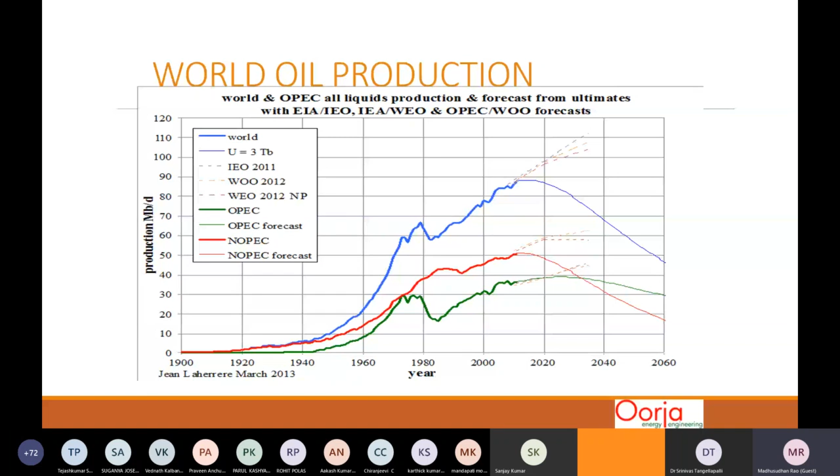In almost all cases, what we've been seeing is that solar thermal as a technology is considered post-installation. Very few projects considered solar thermal during the project's implementation stage itself. Many times when we talk to the industry, the system is already running, the process is already going on, and then we have to retrofit it.

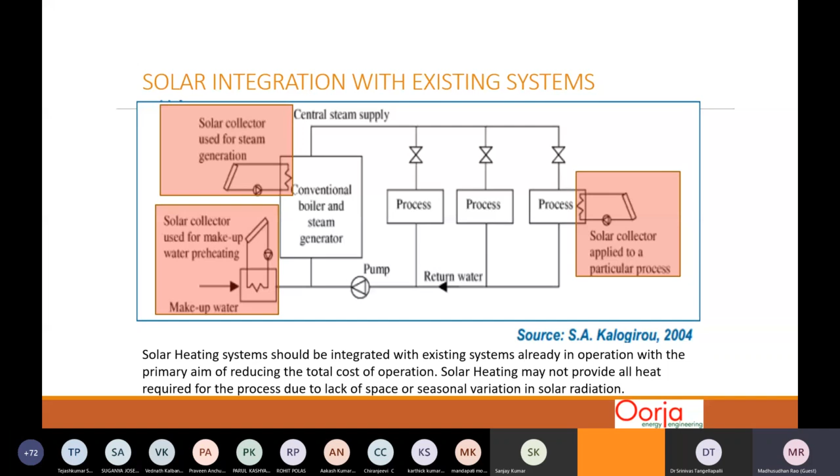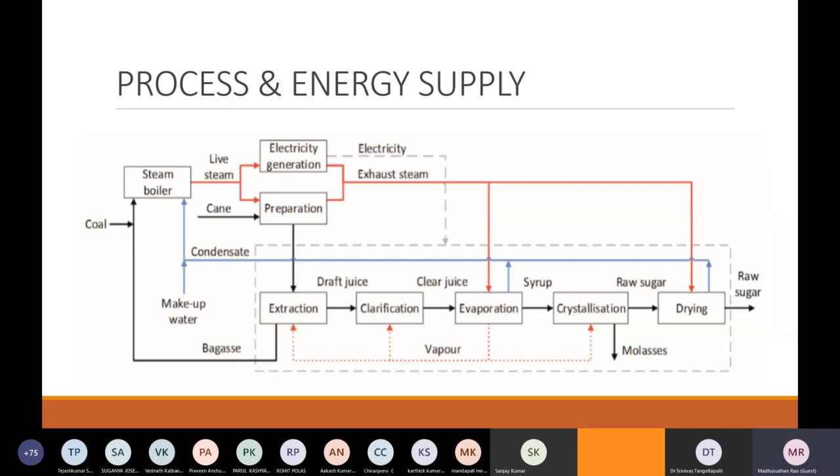So now, if we enumerate what are the process temperatures. As I said, the boiler live steam, which is from the boiler, the maximum temperature is about 360 degrees centigrade. The return from the process comes at 128. So similarly, there are other temperatures. You will see that there is a great amount of variation in the temperatures that are required for different processes, both in the feed temperature as well as the return temperature. So based on this, we can grade what is the opportunity for us to implement solar thermal.

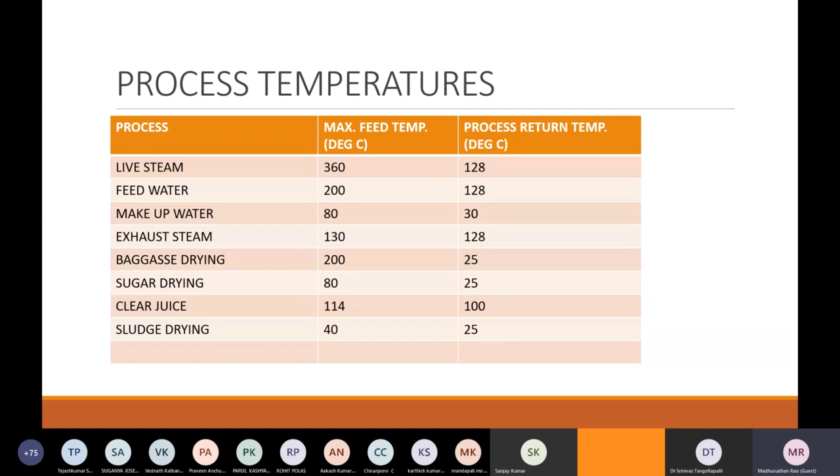So if you see, the highest potential opportunities would be the ones which require the lowest temperature. The reason why I'm pointing this out is, many times when we talk to industry, they do the reverse of it. They try to get the highest temperature possible, which is difficult, especially in current conditions. I'm based out of Hyderabad, and there's been so much rain this season that it's been almost cloudy for the last 3-4 months or so. So steam at high temperature cannot be produced in this.

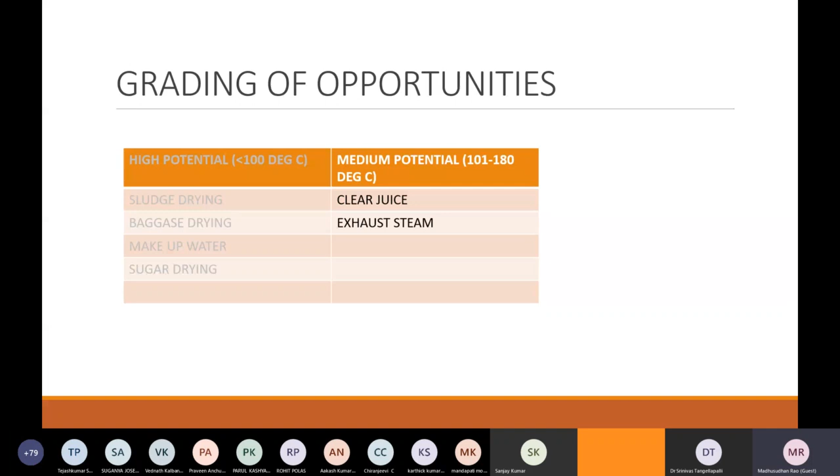See, we have done projects where we have touched even higher temperatures. I'll show you later that in certain projects, we've reached temperatures higher than 600 degrees centigrade. But what matters in an industry is, can you deliver that temperature consistently day after day? So just because we have achieved a particular temperature in certain conditions doesn't mean that we can use that as an example to implement that for industry. Because in industry, every day the production has to be there. They are looking at a consistent and stable source of energy, because the process temperature remains the same. So unless you are able to give that, one shouldn't implement this.

And this is where the challenge with solar thermal comes, because in fossil fuel based systems, we are in control of what should be the input, whether it is coal or diesel or any other fuel. We have a stock of it and we control the feed rate. Therefore, we control the output. So if the output required is, let's say, 100 kilowatt of heating, or 5 tons per hour of steam, we know how much fuel we have to give for that, and we can get that consistently. However, in case of solar, we are not in control of the input. Therefore, we cannot be in control of the output.

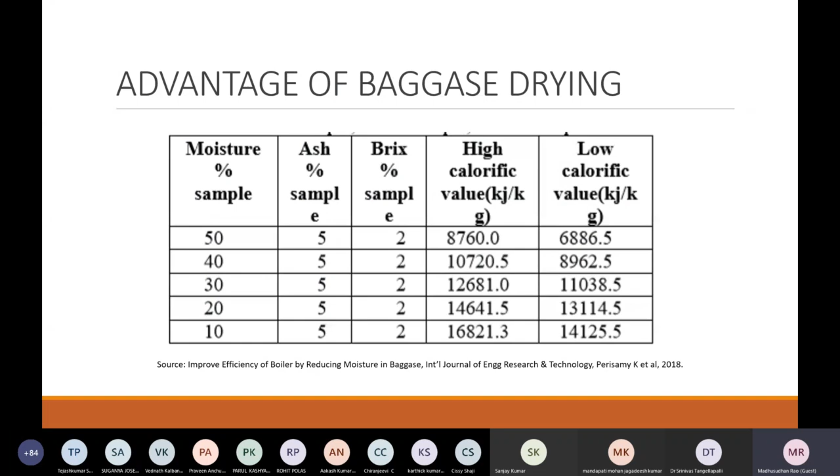In other cases, yes, sorry, sir. Just 1 minute. Sir, the previous slide please, sir. Vacuum tube filter. Yes, sir. This one? Sir, yeah, the vacuum tubes, one end is closed, one end is open. I have a doubt how air will go inside and get heated, because only diffusion takes place, I think so. Is it that effective?

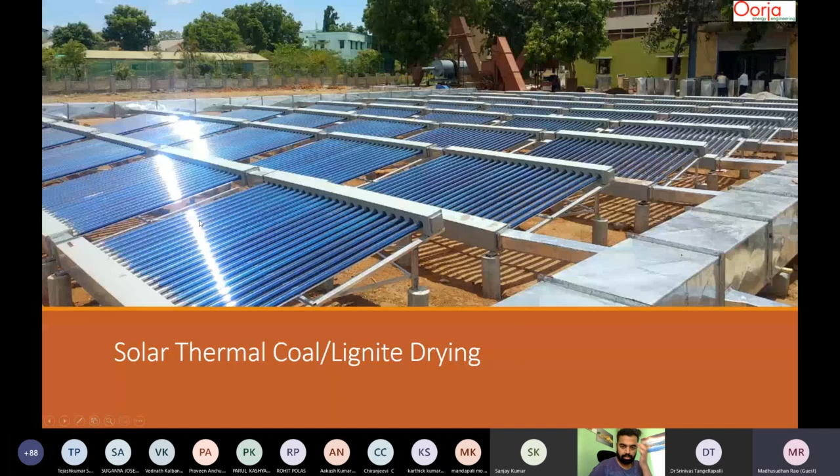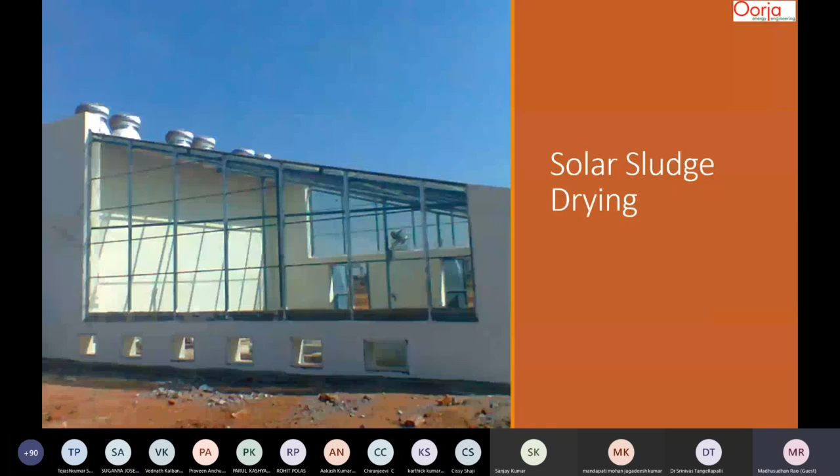Okay, so in this case we have only used solar, but the heat can also be supplemented further. We have given this design, but have not had an opportunity to implement it. Depending on the type of sludge, we can embed pipes like the radiant heating that I had shown in the previous presentation, in which we can circulate hot water, obviously heat.

Even from a cooling plant, water going to a cooling tower can come here, provide that heat, cool down and go back. It can use a heat pump or even an additional solar collector field. It depends. In most cases, we try to use the waste heat that is available to enhance the evaporation rate in a sludge dryer.

These sludge dryers are not common here, but are quite common in Europe, where there are automated sludge dryers which can level and mix the sludge so that the drying happens. The reason why it is popular there is because they have a problem of insufficient radiation, and therefore they use such greenhouses for faster drying. So this is another low temperature application that is feasible for industries.

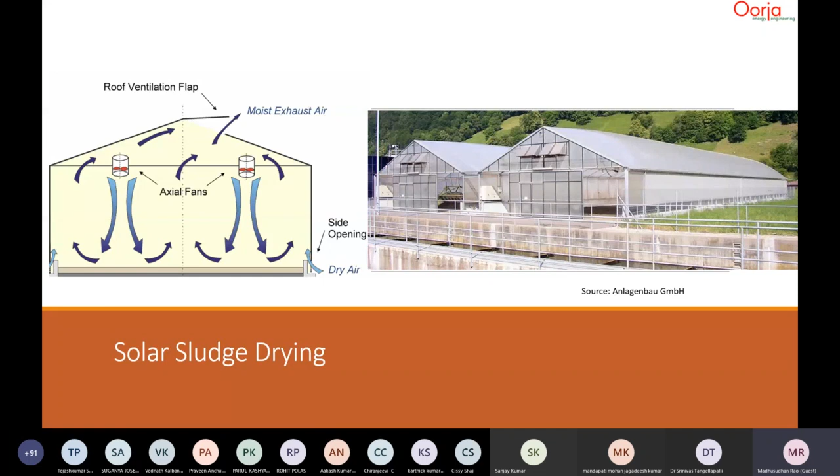Many are aware of agri drying; I will not spend much time. These are simple solar water heaters that were modified a bit to provide boiler make-up water preheating. This is viable especially if the fuel being used is not coal but something like diesel, and there is a constraint of the space available. Then feed water preheating would be the application that is most economically viable, because you will not require a large field, but at the same time there will be savings on the fuel.

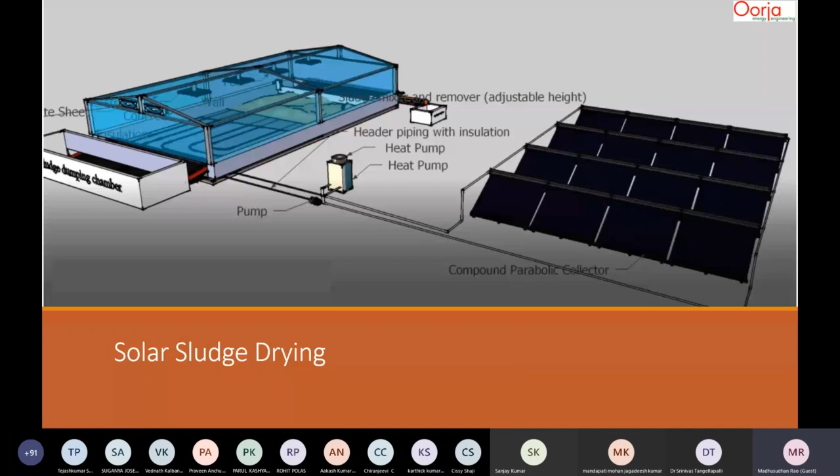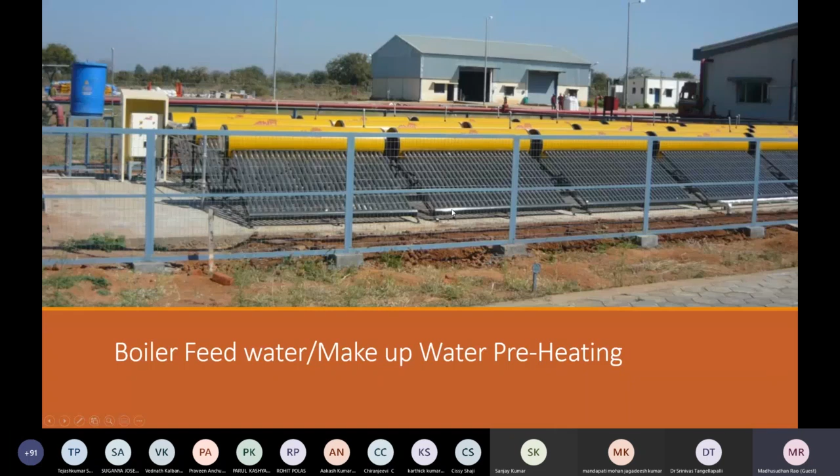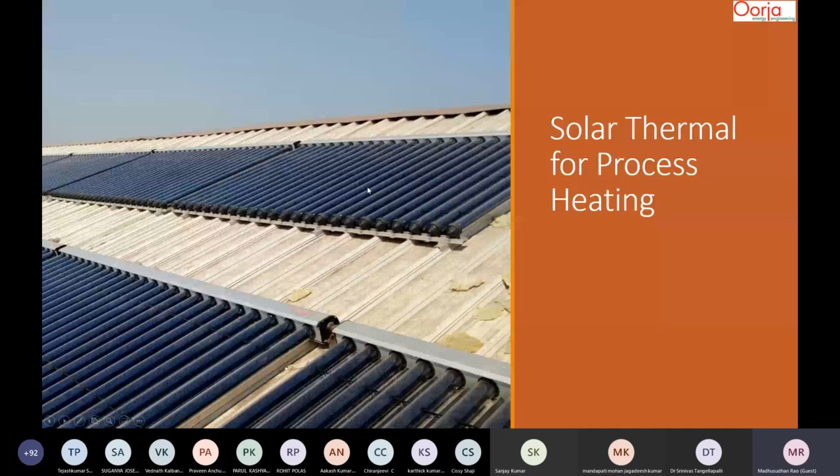So all these applications that I've shown till now are temperatures which are below 70 degrees in most cases. We can use these compound parabolic collectors, in the manifold that you see here, the main header pipe. This is installed in an automotive plant in Jamshedpur, and these can provide temperatures up to 150-160 degrees centigrade, but we usually recommend them for temperatures between 70 to 120 degrees centigrade. So this is the temperature profile of the output that we get from this field.

You will see the field starts delivering high temperature, and of course there is a storage tank also provided in this particular project. So this is for washing of parts. In an automotive plant, you have parts coming in which need to be washed before they can be assembled together. Today, the hot water required for this washing is around 70 to 80 degrees centigrade, and electrical heaters are being used.

These are just the bigger version of the regular washing machines that we use at home. Electricity was being used, so instead of using electricity, it has been augmented by hot water from solar. So you will see that even at 10 o'clock in the night, the temperature available in the tank is around 70 degrees. This has been done with a storage tank of about 2 cubic meters or so.

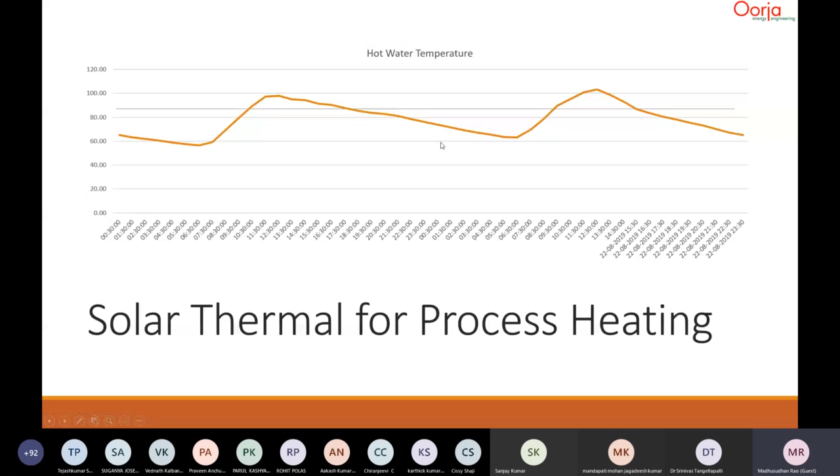This is something that I already talked about in my previous presentation, where space heating applications in very harsh conditions can be taken up using solar collectors and storing that heat in the tank. For higher temperature applications and for steam generation, we use parabolic troughs.

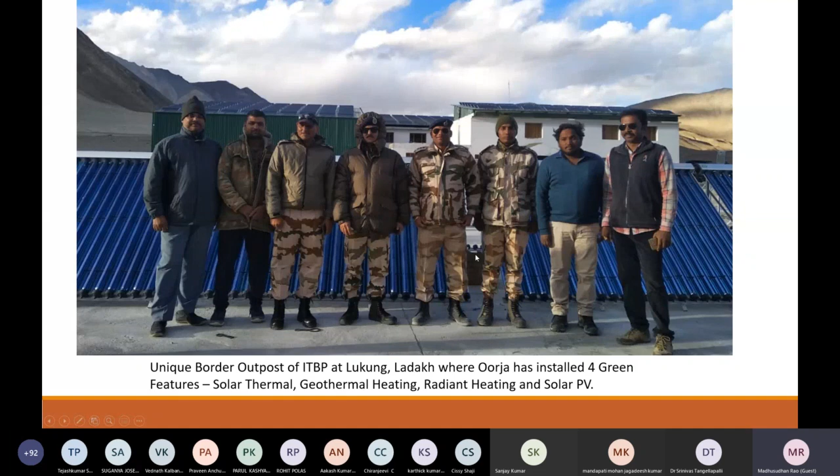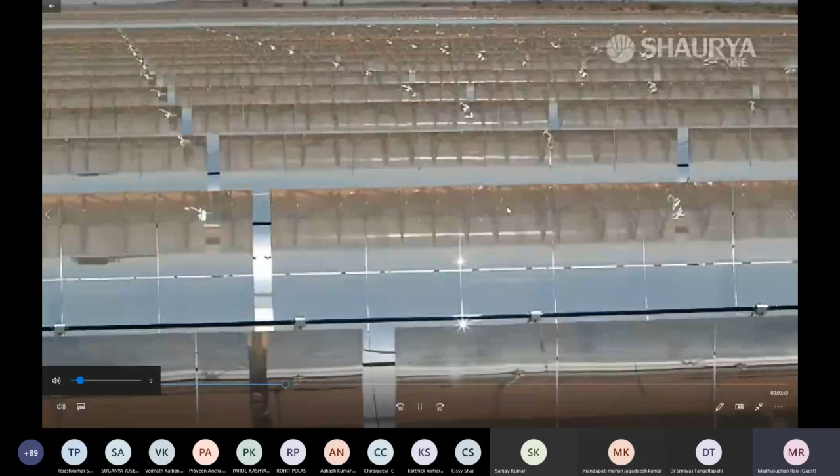So there are large installations that you will see. I'll just quickly show a large installation of such a thing. This is multiple of such one parabolic trough that I showed. This solar field for power generation is in Rajasthan. It's called Godavari Green Energy. It is one of the first, not the first, but one of the first solar thermal based power generation plants.

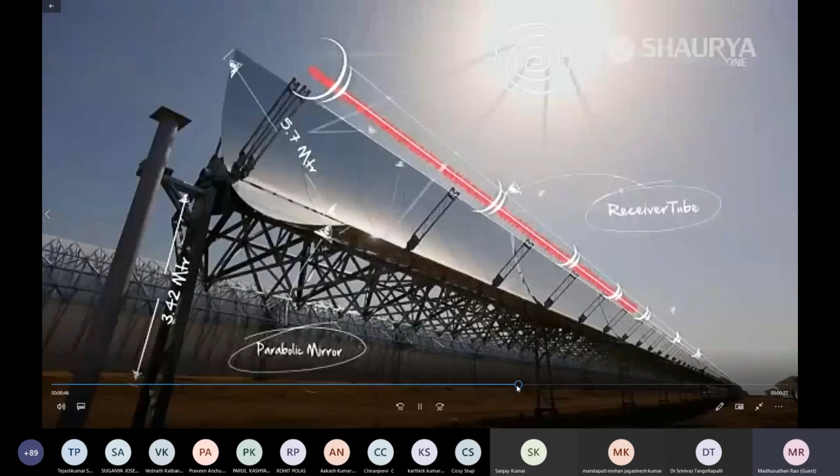So what we manufacture for industrial applications is also of the same size. The span is a standard design across the world. All of us get the same curve because the manufacturers have standardized the curve. This is about 5.7 meters in the span, and the length works out to around 12 meters. So that's a standard size everybody uses.

Sorry, where were we? Yeah.

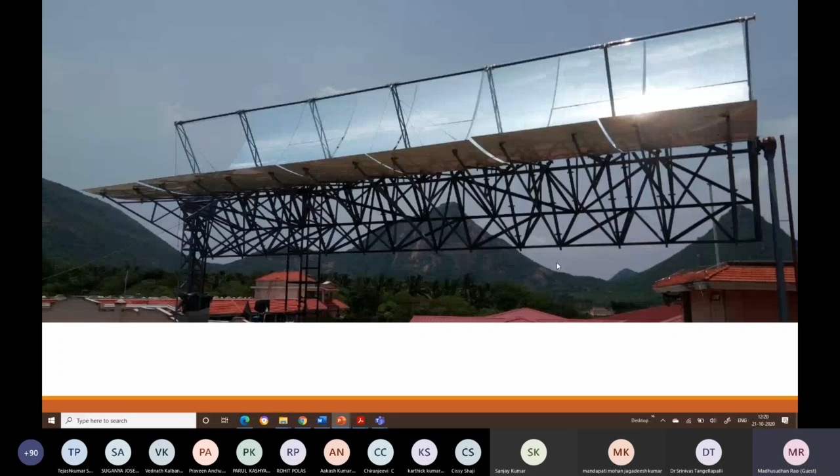Lastly, for temperatures higher than 300 or 350 degrees centigrade, we have typically used heliostats. These are the heliostats with which I was saying we could achieve around 600 degrees centigrade, but we have not used these in any industrial application so far. These were manufactured only for R&D purposes, and under certain conditions we have achieved above 600 degrees centigrade, used primarily for hydrogen production related applications, but that is not a mainstream application.

So hopefully these high temperature solar concentrators will also become viable. At this point, we don't see viability for industrial applications. It will require a little more work till we make it viable for industrial applications. I will get into economics, but if there are any questions at this point, I'll handle that. Otherwise, I'll get into the economics of all these different types of concentrators.

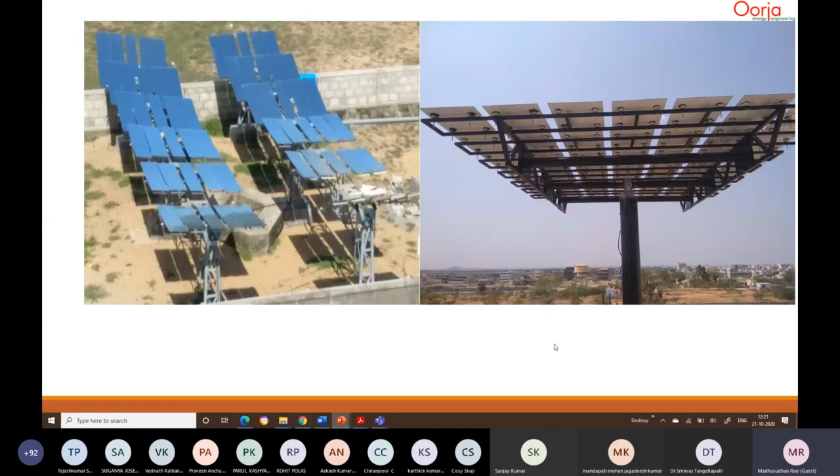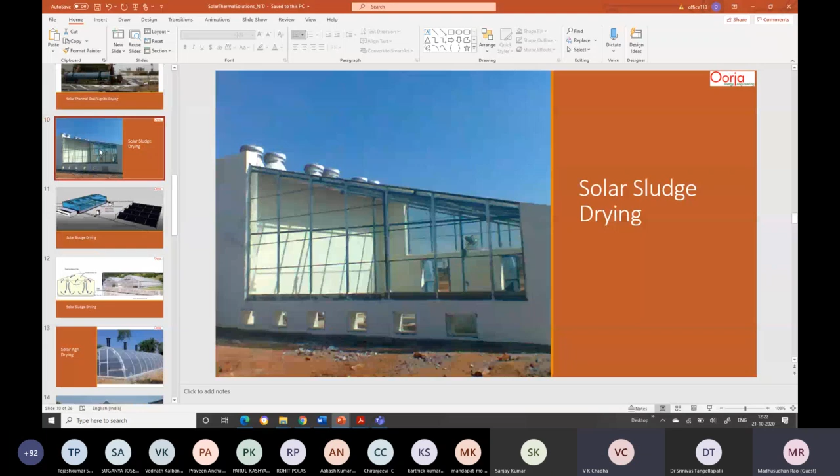Sir, I would like to know about the general procedure of maintenance in these types of plants. What type of maintenance is required, sir? The maintenance that is required is cleaning, which is more stringent in these two types of concentrators, because they are very precise and the concentration ratio is very high, and accumulation of dust significantly reduces their performance.

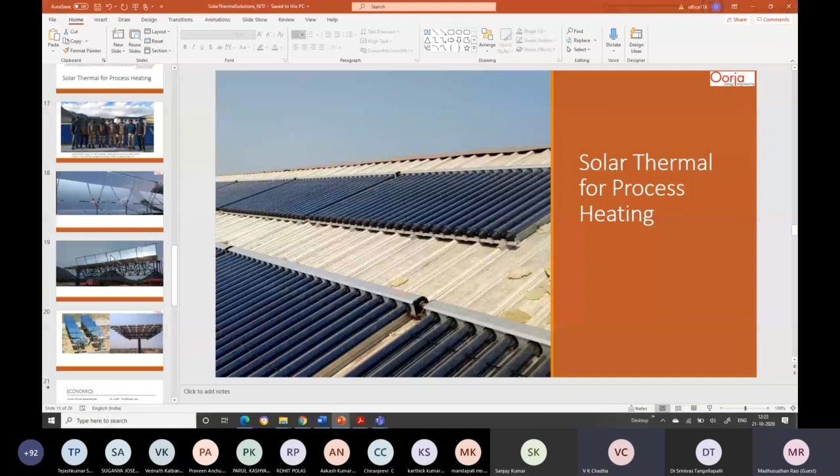On such solar collectors, you can see there is a little bit of dust. If there is a little bit of dust, there will be some reduction in performance. Usually what we suggest for such collectors is cleaning once a month is sufficient. But for these types of collectors, the cleaning is almost on a daily basis.

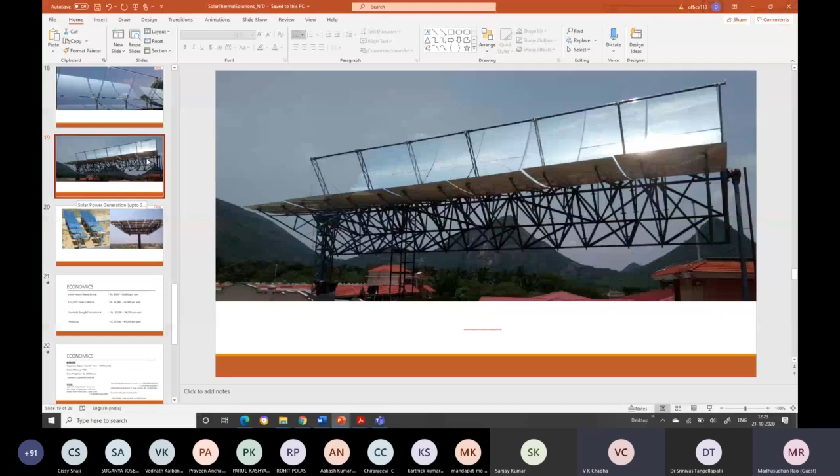These require more water. Apart from that, the occasional maintenance required in these kinds of ones is, if you can see, there is a slew drive here. There are drives because these are tracking systems, right? These drives may need to be checked.

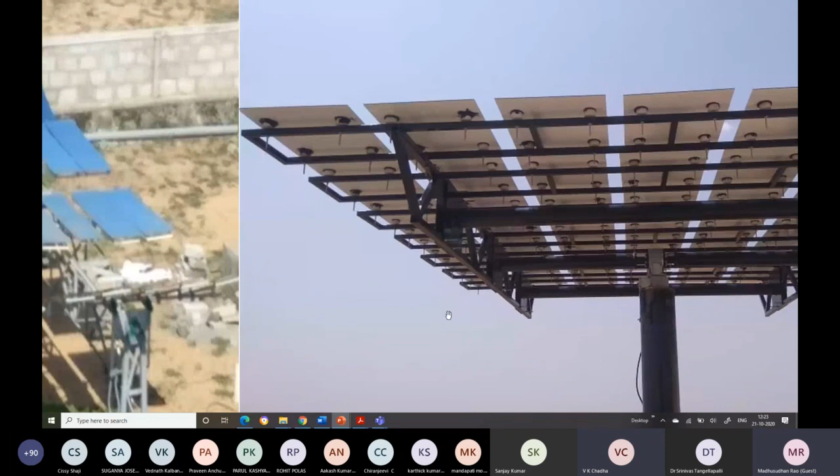Oops, sorry. No, it's okay, sir. Thanks a lot, I got it. Yeah, that's good. Thank you very much, sir. You're welcome.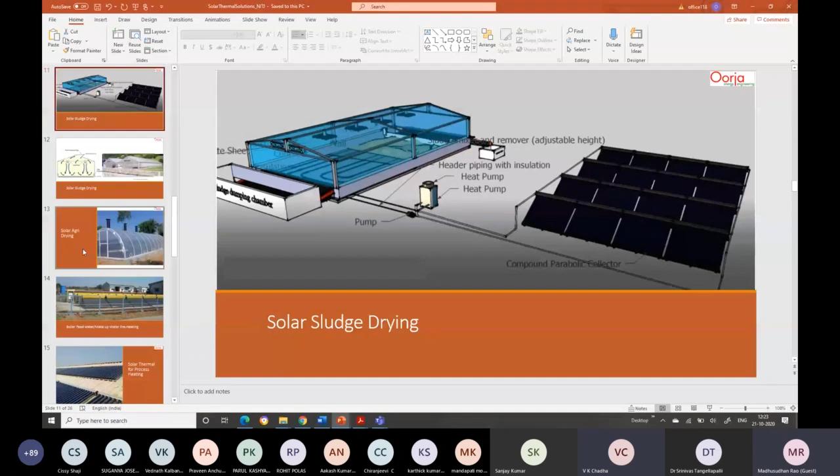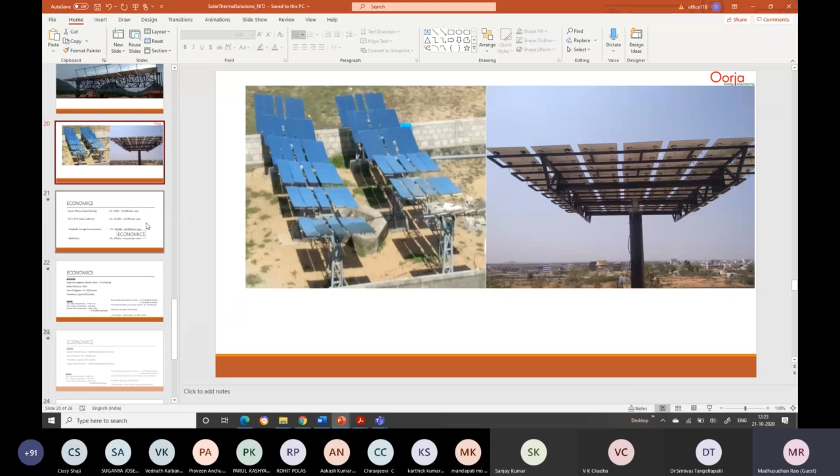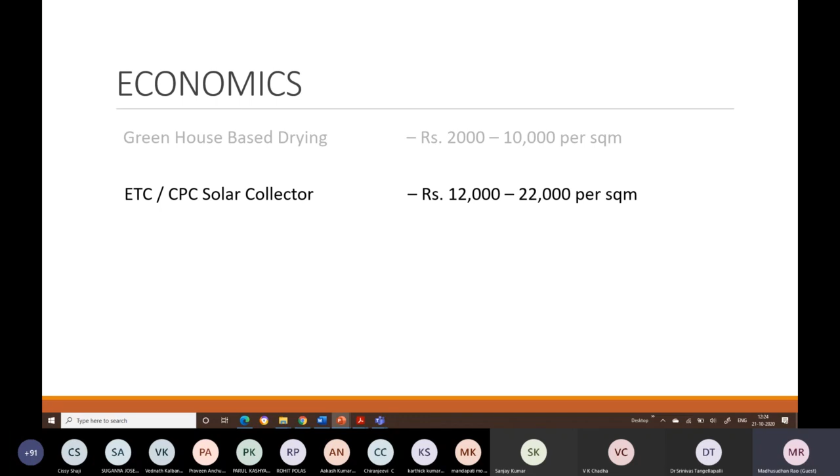So let's look at the economics of this. Typically, greenhouse-based drying, which is much simpler, which I showed you for sludge drying, will vary between 2,000 rupees to 10,000 rupees per square meter, depending on whether you're using polycarbonate, what kind of polycarbonate, or polyethylene film. ETC or CPC solar collectors will range from 12,000 to 22,000 per square meter. Parabolic concentrators 20 to 26,000 per.

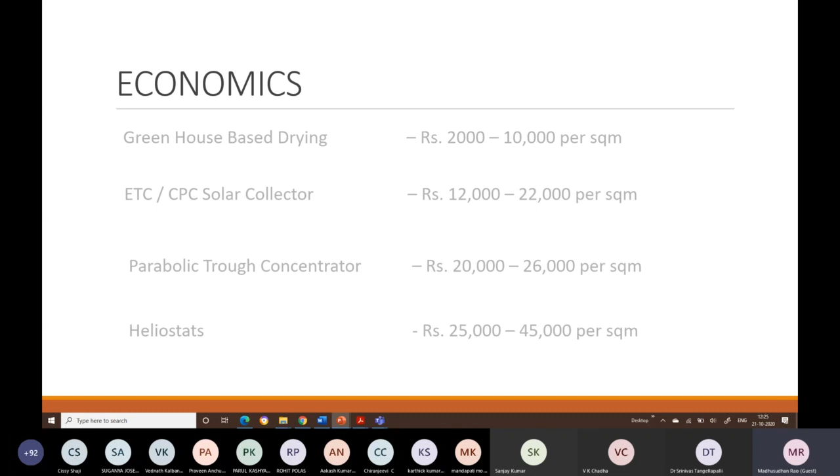This is the general range of price that you will have to pay for these collectors. The viability will depend on various factors. So let me take different scenarios to explain how the viability varies depending on the usage.

The first one we'll take is: is it feasible to dry sugarcane bagasse economically using solar? If we look at the sugarcane bagasse, the calorific value, the boiler efficiency, and the cost of bagasse, what we can calculate is that for every 1 rupee spent, bagasse delivers 605 kilocalories of energy. That is what I can get from 1 rupee I spent.

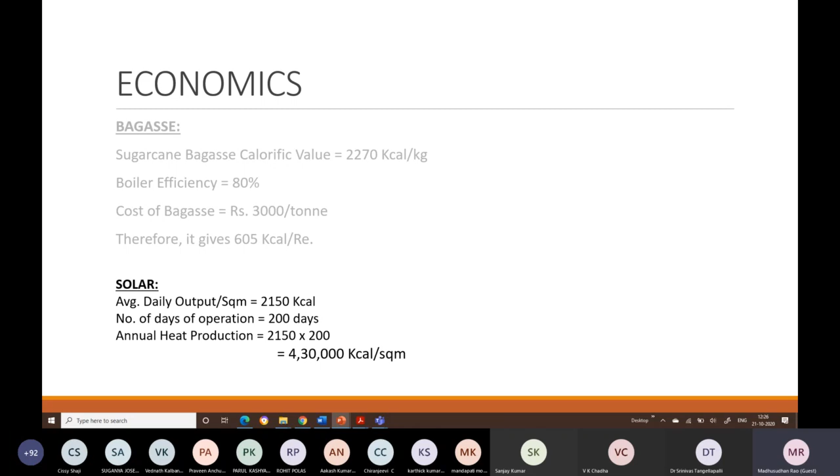Now let's look at the solar option. What we have to understand here is that the sugarcane business is seasonal. The bagasse is available seasonally, so the operation is not for all 365 days. It is only for 200 days. So whatever advantage solar can provide, it can provide only for 200 days. Therefore, per square meter, solar can deliver a little over 2000 kilocalories on a daily basis. That is the energy it can provide.

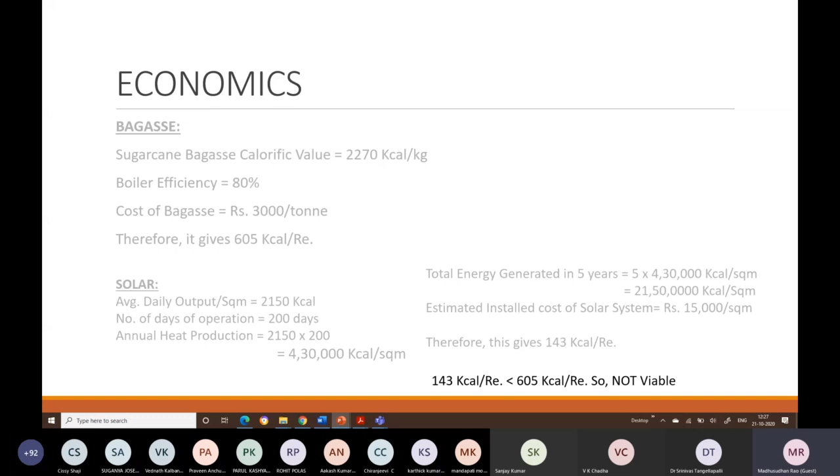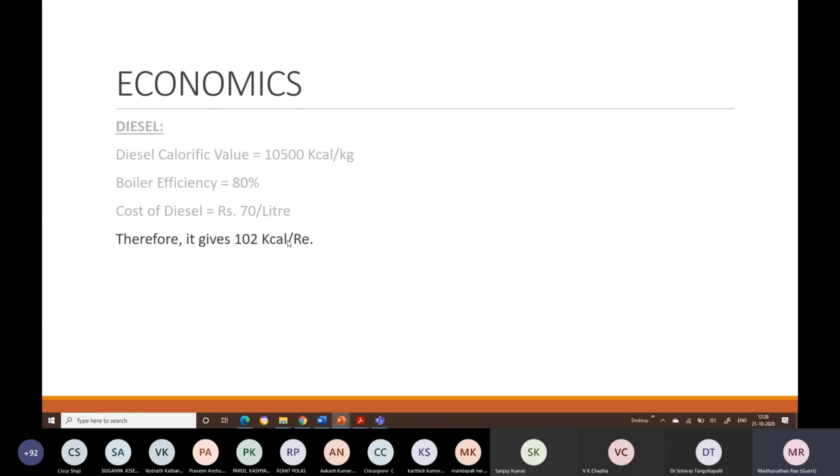So let's look at another example. In this case, we are looking at somebody who's using diesel. Diesel's calorific value is 10,500 kcal/kg. Taking density and everything into account, finally we see that by spending 1 rupee, we are getting 102 kilocalories as far as diesel is concerned. That's the energy we get.

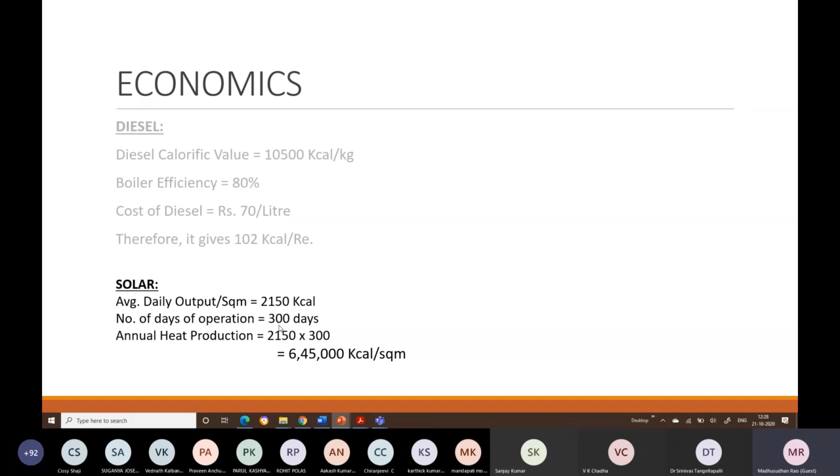So even though the cost of the system is high here, even with a higher cost system of 25,000 rupees, it is viable in this case because they are using diesel, and with diesel they are only getting 102 kilocalories for every rupee spent. Investing in solar, even at a higher cost of 25,000 rupees per square meter, we will be able to see that it is viable. The viability of solar in an industry depends on different factors, and all of them have to be taken into account to determine the viability.